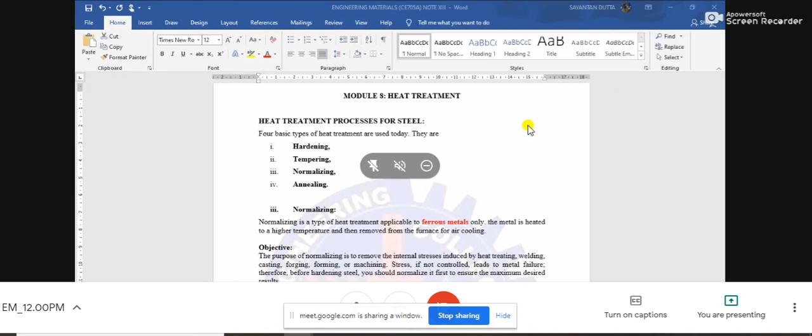Okay, now you can see the presentation of the note.

In hardening and tempering, the metal pieces after heating to some set temperature will be cooled down in some cooling bath. But in case of normalizing, the heated metal pieces will be cooled down by air cooling.

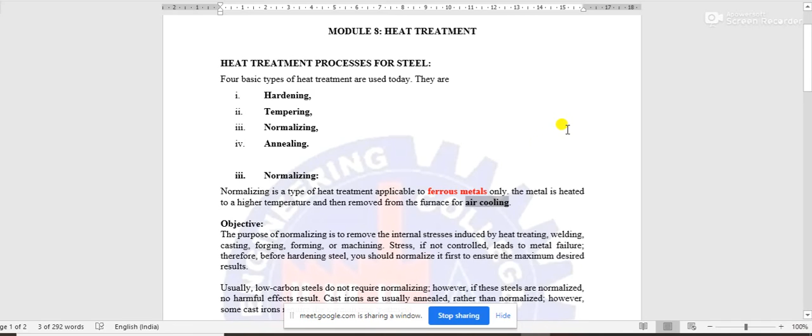Now the objective of normalizing is to remove the internal stresses induced by the heat treatment. As we are discussing heat treatment processes, that's why I am giving stress on heat treatment, but those types of extra internal stresses may also be generated in welding, casting, forging, forming or machining. These are obviously some mechanical processes. Through these processes also, if the metal piece goes through them, extra internal stress may be produced in the piece of metal. Those extra internal stresses will be removed by this normalizing process.

The bad effect or adverse effect of this stress is that if the stress is high, then it leads to failure of the metal. When the metal is treated with some mechanical process, it may fail or develop cracks if the internal stress level is higher than the desired stress level.

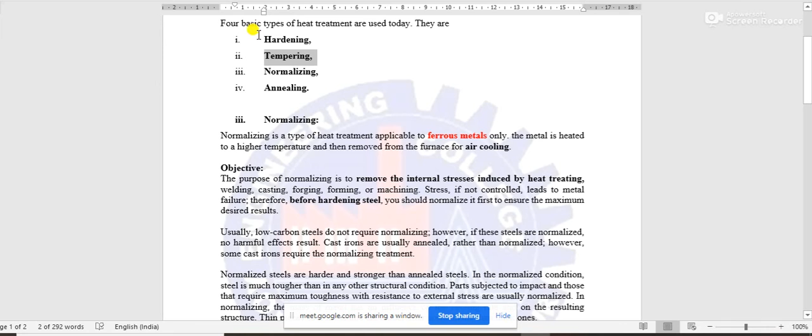Now why is this part of the sentence important, that is, before hardening steel? If you remember tempering, the process of tempering is done after hardening, that is mandatory for tempering. But normalizing is done before the hardening of steel, because hardening of steel will generate some extra stress in the metal piece used for heat treatment.

If we cannot release the extra stresses or reduce the stress level in the metal piece, then when hardening is done on that metal piece, failure will occur. That's why by normalizing the metal piece we reduce the internal stress level, so that when hardening is done, the stress produced during hardening will not exceed the desired stress level. That is the objective of normalizing.

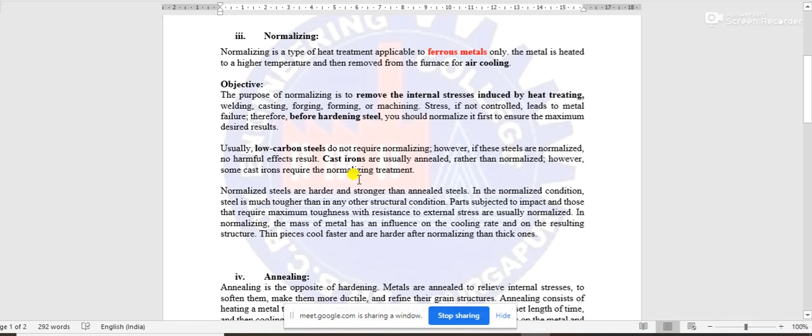Now, low carbon steel and cast irons are the two types of ferrous metals. In case of low carbon steel, normalizing is not required, but if you normalize low carbon steel, there will be no adverse effect on the steel. However, normalizing is not required for low carbon steel, and cast iron is usually annealed instead.

Now, annealing is the next process of heat treatment. Cast iron is also one of the ferrous metals which does not require normalizing, but requires annealing. That's why low carbon steel and cast iron do not require normalizing, but other types of steels do require normalizing by this method.

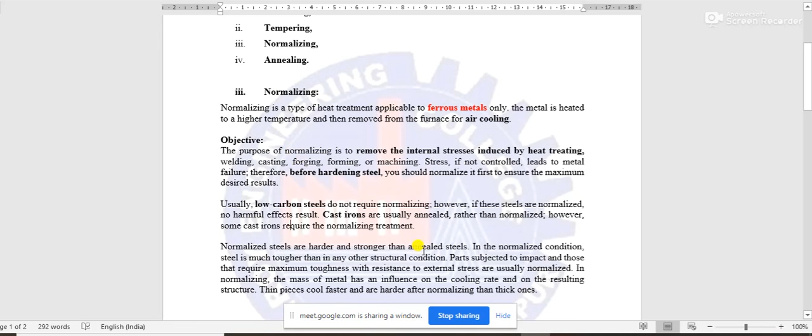Now, as the stress level in normalized steels is lower than in unnormalized steels, the normalized steels are harder and stronger than the annealed steel.

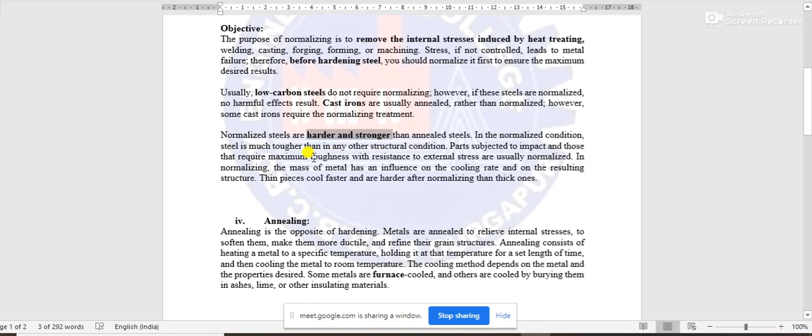As we have not discussed annealing yet, you may not understand this sentence: that is harder and stronger. But not only annealed steel, any other steel treated by some process is weaker than normalized steels, normalized by this normalizing process.

Now, this is also tougher than any other steel which has gone through any other heat treatment or treatment process.

Normalizing process is required when the metal piece is intended to subject to impact load. Any ferrous metal piece intended to subject to impact requires maximum toughness, which gives resistance to the external stress. Those types of metal pieces actually need this normalizing process to be done on them.

And one point: the mass of metal has an influence on the cooling. This may be the next point of normalizing process. The mass of metal has an influence on the cooling rate and on the resulting structure. Thin pieces cool faster and are harder after normalizing than thick ones.

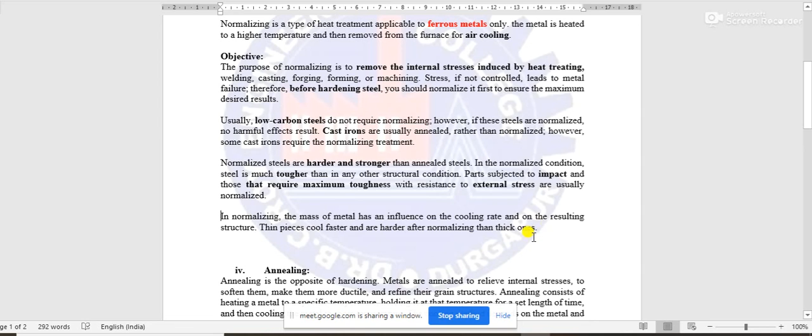Now coming to annealing. Annealing is the opposite of hardening. This sentence is important because, by annealing, metals are annealed to relieve internal stresses and to soften them.

This process is also done to relieve internal stress, but by softening the piece of metal. Hardening is actually to make the metal harder, but annealing is the process by which the metal is made softer than that of hardening, and the objective is to make them more ductile and refine the grain structure.

Ductileness is an important and useful factor for any metal. Obviously, to make the metals ductile, we have to soften them by releasing the internal stress level.

And the process is nothing but heating the metal. That is the general process of heat treatment: heating the metal to a specific temperature.

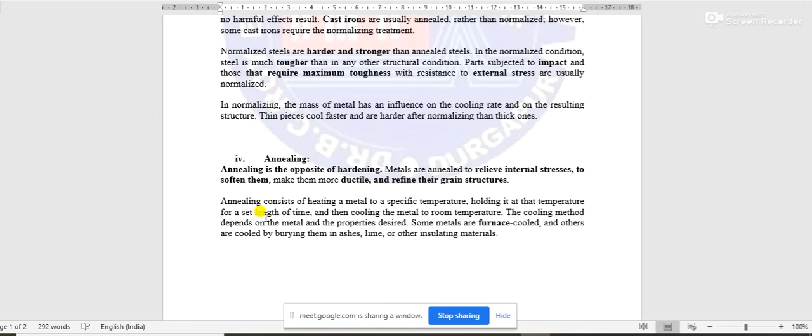Heating the metal to a specific temperature, holding it at that temperature for a set length of time. Set length of time means the time is set, that is 1 hour or 30 minutes or 2 hours, set previously, and we have to hold the temperature for that time which is already set.

And then cooling the metal to room temperature. The cooling method depends on the metal and properties desired. Some metals are furnace cooled, that is not air cooled, and some others are cooled by burying them in ashes, limes, or other insulating materials.

This means this cooling process is very slow compared to air cooling, and the cooling process is different from the normalizing method. The objective is much similar, that is to reduce the internal stress level, but the intention is to make them softer or more ductile. That is the intention of this process.

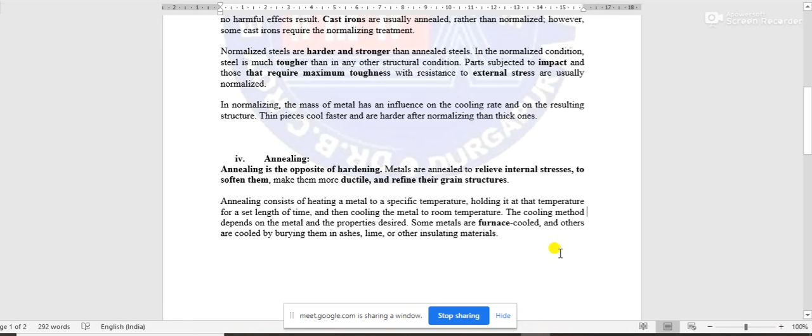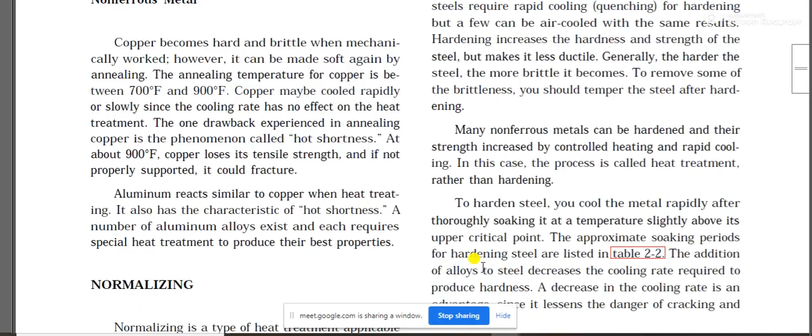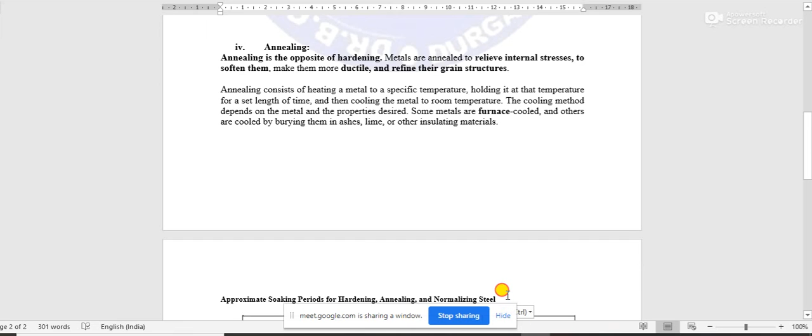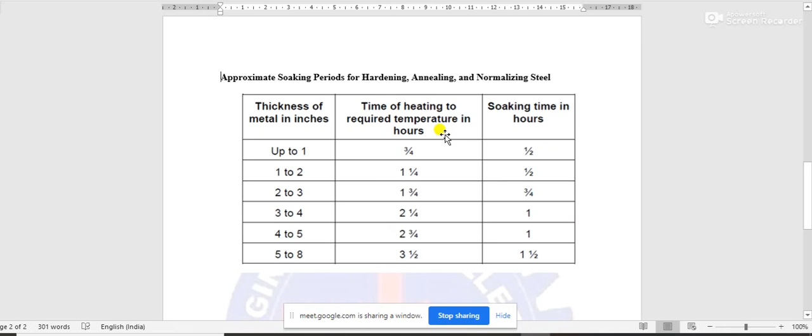This table, I think, I should write as the approximate soaking periods of hardening, annealing and normalizing steel. That is these three processes of heat treatment. This is the soaking period or soaking time for the steel, dependent on the thickness of the metal in inches. This is the time of heating the piece, and this is the soaking time in hours, that means the holding time at that temperature in hours. This timing is important when some thickness of steel is given.

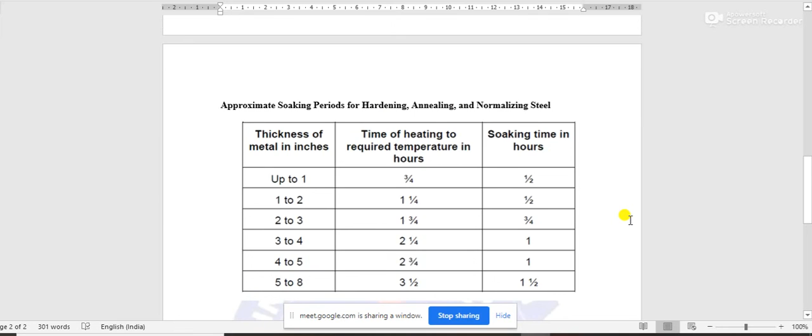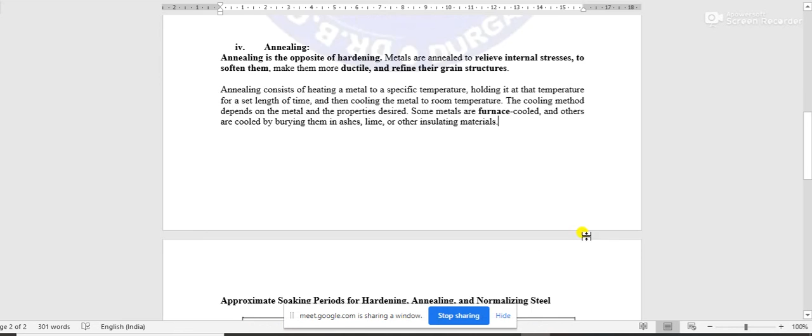And there are different types of annealing process which we may discuss in future classes, but today I'll give you one assignment. One thing I should tell you.